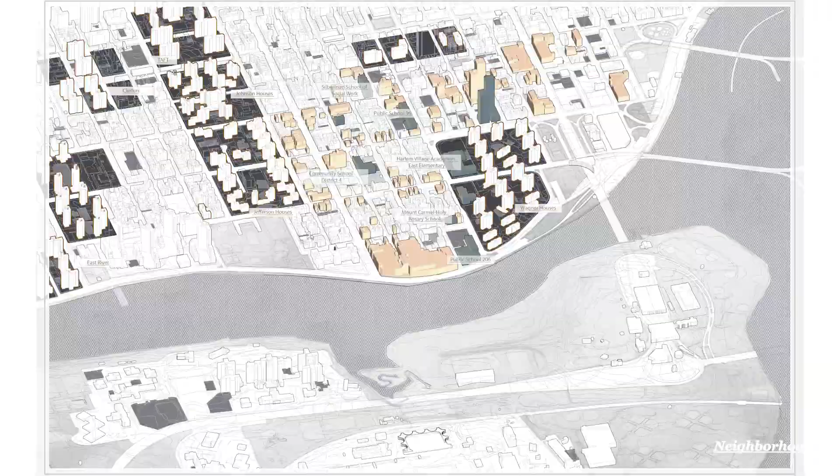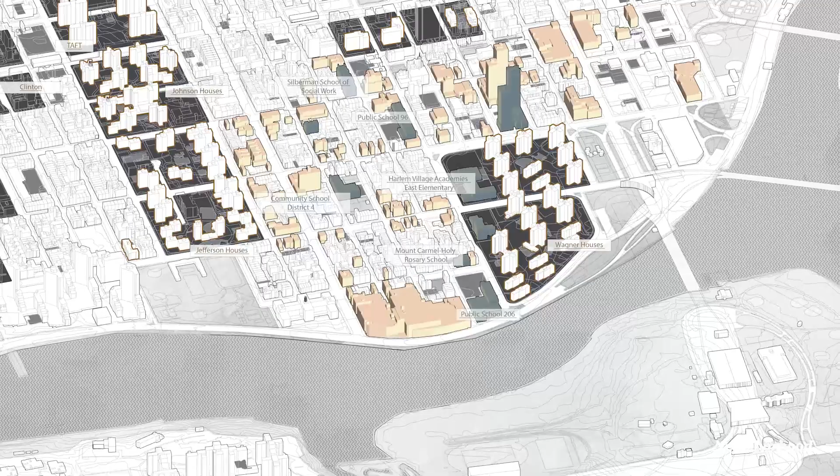Shop-lined streets support apartments above. In El Barrio, as locals call it, elderly men chat, groups of kids roam, couples push strollers. A great diversity of family types is evident. But the neighborhood lacks the programmatic diversity of Harlem's identity. Existing programs are isolated and scattered. A hybrid approach is needed to help El Barrio and other NYCHA houses regain its identity.

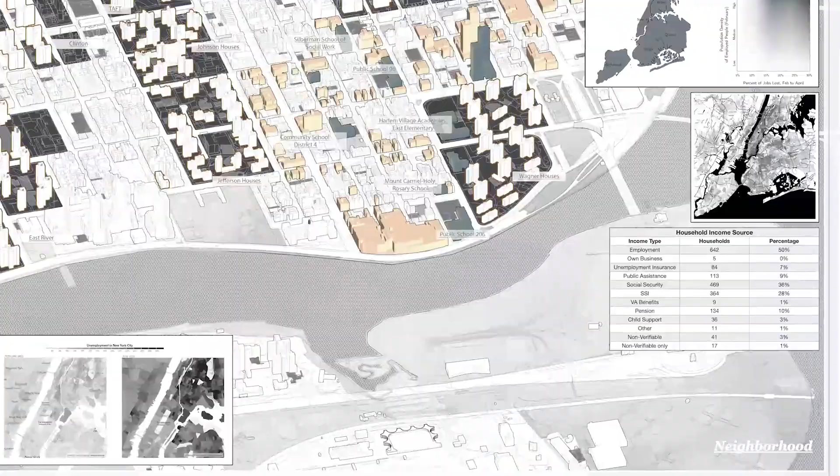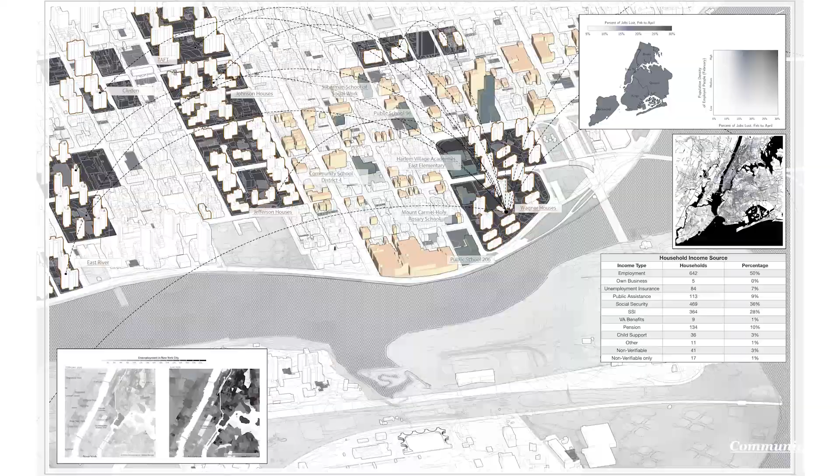On a broader scale, Harlem struggles with incomes and unemployment. 1 out of 10 adults are unemployed, and residents spend over a third of their income on rent. 2 out of 5 adults have college degrees, while 1 out of 5 lack a high school diploma. Young professionals have limited access to professional development beyond retail. Many of these locals live in NYCHA's subsidized housing. Our Wagner Houses site shows how disinvestment in public housing has led to crumbling infrastructure and unreliable service.

As we approached Wagner, we left the urban fabric. The dense frontage faded into an archipelago of isolated towers of infinite brick and small windows, indicative of a vertical slum. The existing layout prioritizes efficiency over humanity.

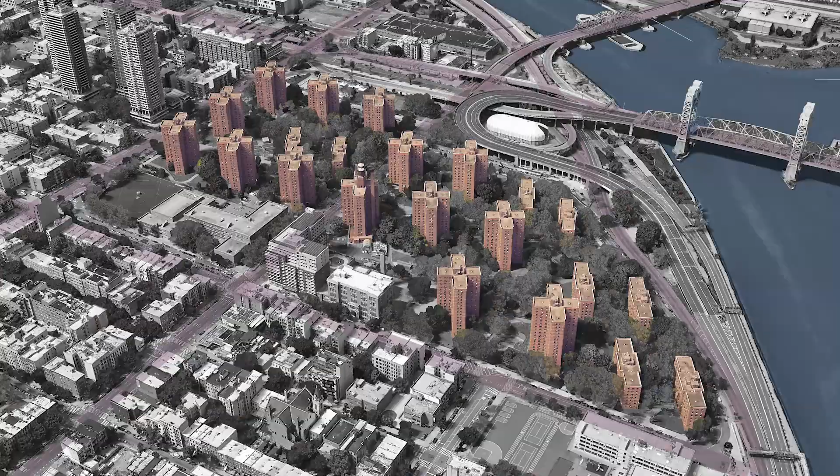Each apartment unit is too small for the often 3-generation families crammed in them. Their tiny bedrooms lack sunlight and balconies. Narrow corridors of yellow tile and trash evoke a prison institutionalization. In the darkness, we were cold, disconnected. These compounding problems create a cycle of dependency. The site hurts health, social life, mentalities, while limited job options stop people from building wealth to escape. They do not remove them. There's water leaks, there's floods, there's total disintegration of no light and gas, no lack of service.

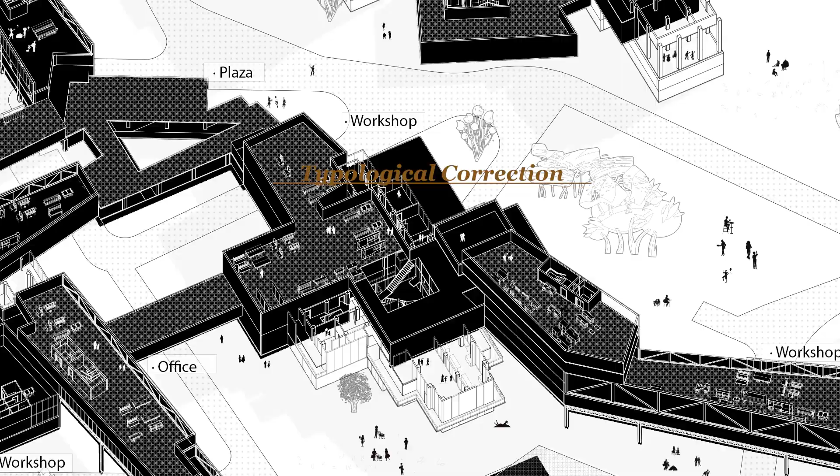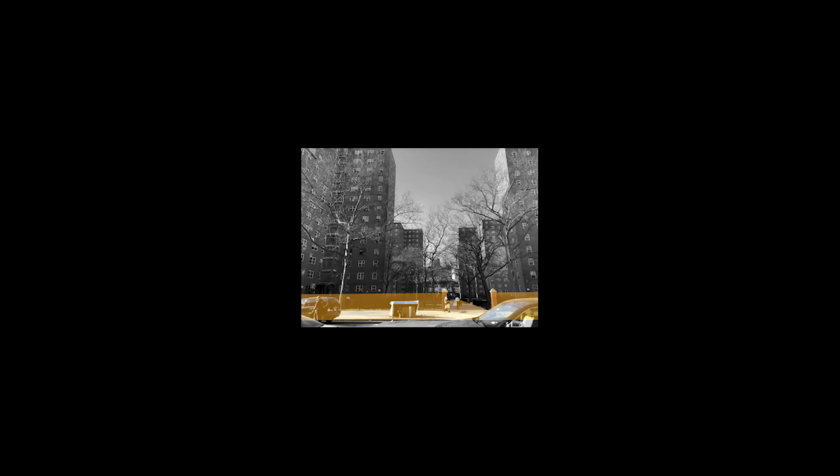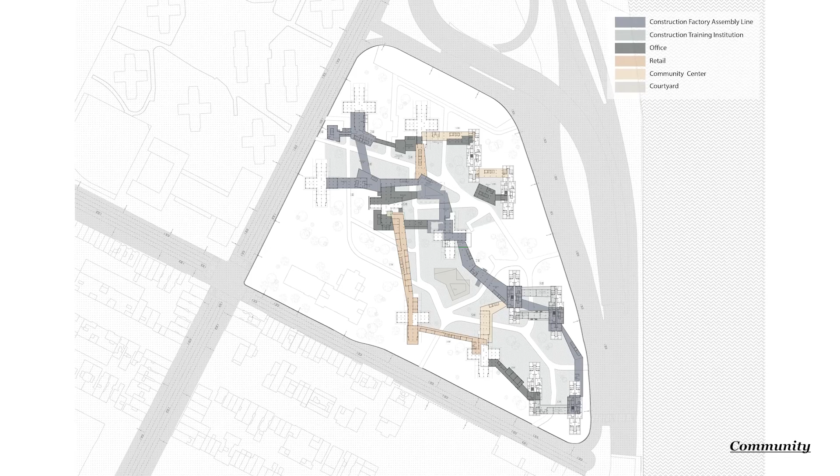Our change starts with engaging youth in civic action, while teaching job skills and collective power. The new Wagner houses establish a hybridity that raises awareness of these systemic challenges. The industrial and domestic realms integrate in experimental live-work-learn co-ops. This solves isolation, unemployment and unaffordable housing, while allowing residents to earn a wage by building their collective homes. Our analysis combined some Harlem functions like carpentry, art, textiles, and crafting, with its flair for music, fashion, and nightlife. Through these frameworks, we aim to end the isolation of the ground space through the residents of NYCHA and beyond.

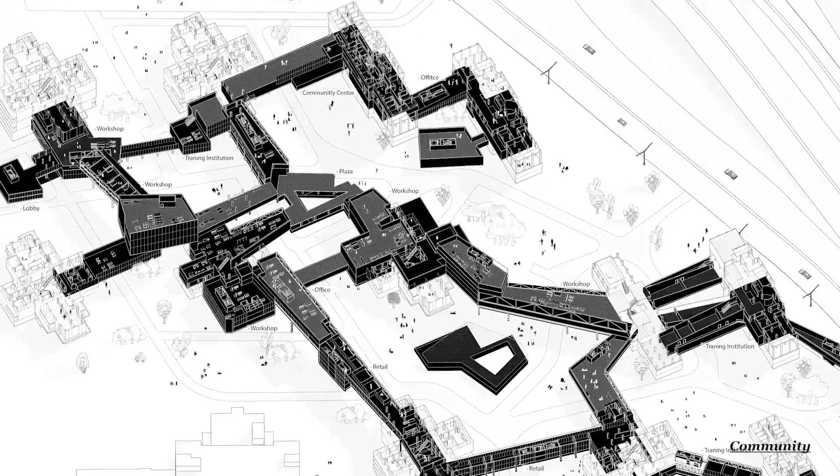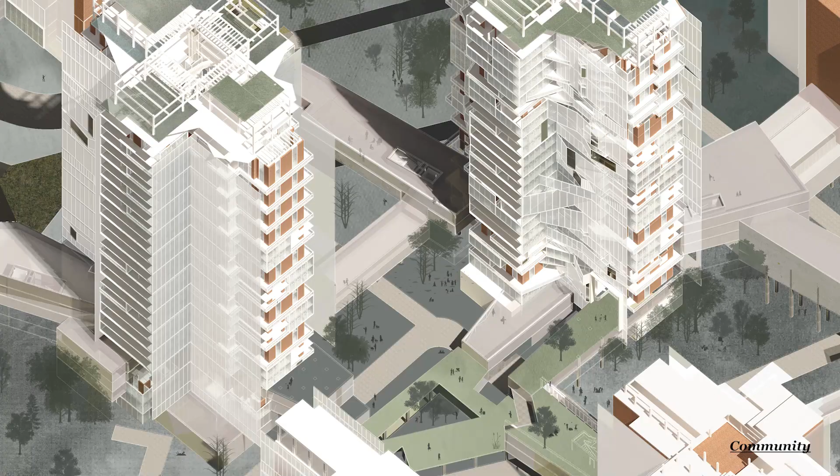First, a bridging system solves the tower's isolation and lack of services. Modernist orthogonality is broken by its angular form. Workspaces provide areas of production for residents. Adjacent institutions offer experimental training. Students become self-sustaining as they learn new construction methods and practice transforming in their apartments. Shops pull visitors through the new ecosystem of consumers, sellers, teachers and trainees to the world. Framed beneath the bridges, wild grass courtyards provide rest and play.

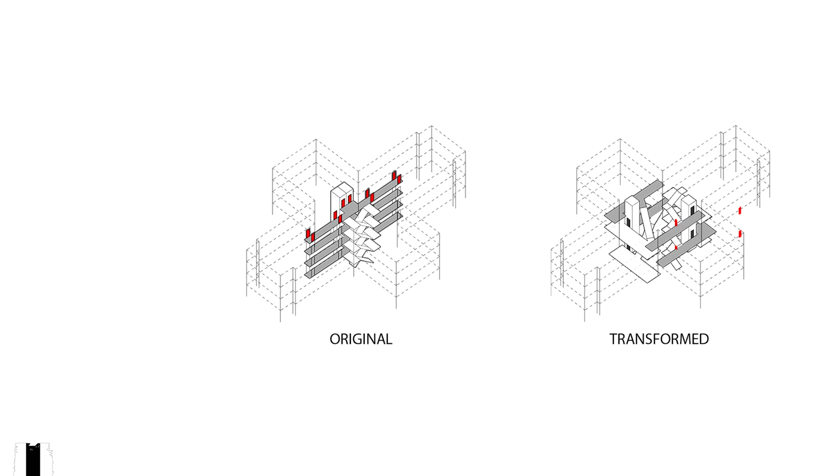Next, the towers extend vertically and horizontally to prevent displacement and add hybrid functions that alter floors. The old construction system and existing materiality are maintained, as sun-oriented patios expand the floors, adding light and views, and escape the dense column grid. Instead of small, dark corridors, the new open-air atrium carves out the stuffy core, passively vents, and creates a breezy, bright center. In lieu of the traditional circulation system, playful circulation increases accidental chats between new neighbors.

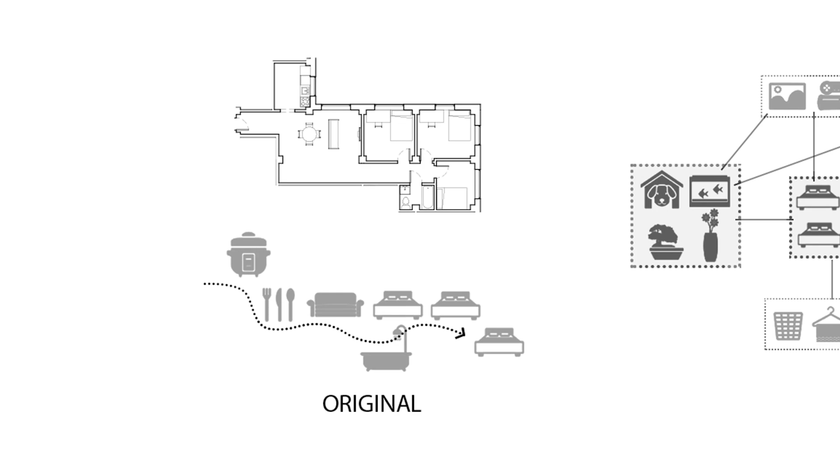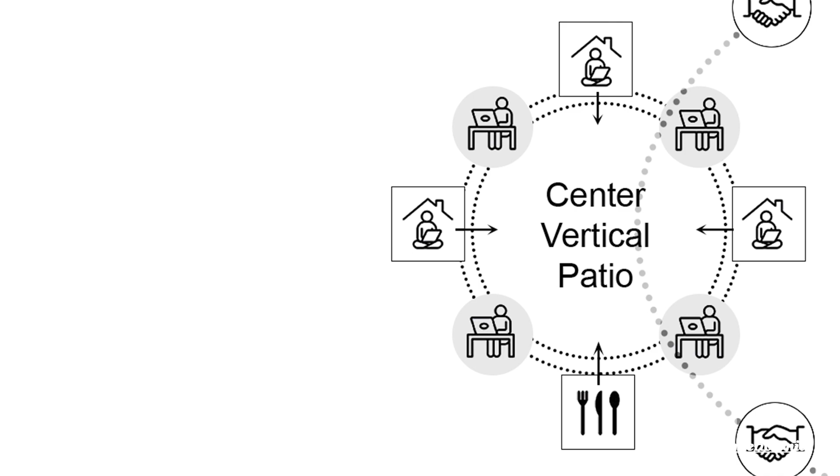Cascading voids interweave functions within one floor, while keeping the programs coherent. Singular units are transformed into collective shared living, becoming larger, more luxurious programs. Our 2 shared unit types are the 3-family and the dorms for 10 individuals. Integrated shared office types are split into the south, sun-facing kitchens, and the customizable workspace on the northeast and west faces. Meanwhile, lowest floors contain necessary functions like laundry and canteens. Bedrooms and living rooms face outside, and offices face inside, enhancing the collective and co-working atmosphere.

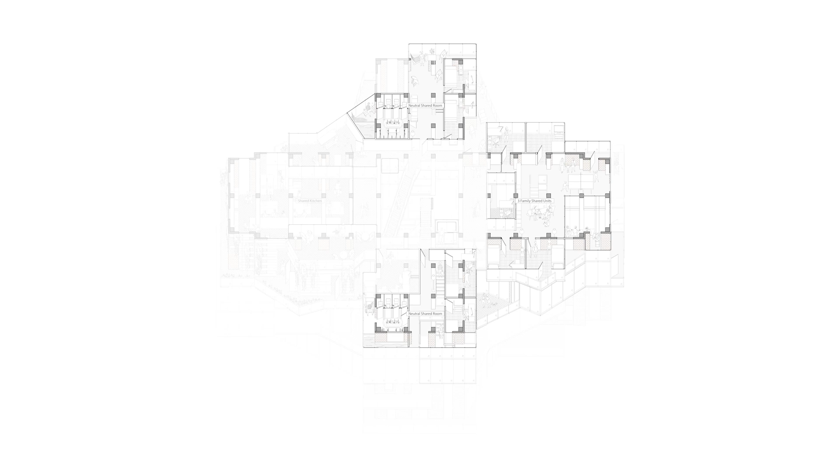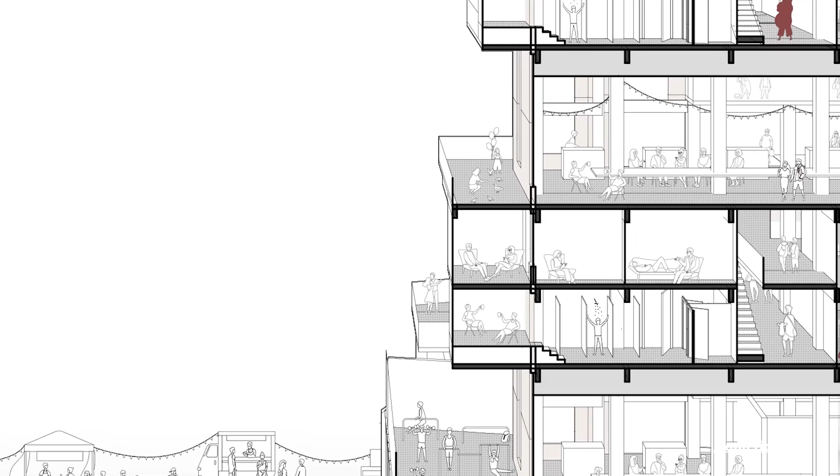Multiple stairs and elevators access alternating open mezzanines. As you leave your unit, you look into kitchens and in-home office rooms, and see others in the shops below. Our units feature individual, modest-sized bedrooms. The bedrooms are realigned and grouped, forming a collective welcoming suite. Double-height winter gardens tie two floor programs together. This channels light into the apartments and provides another layer linking outdoor and indoor space.

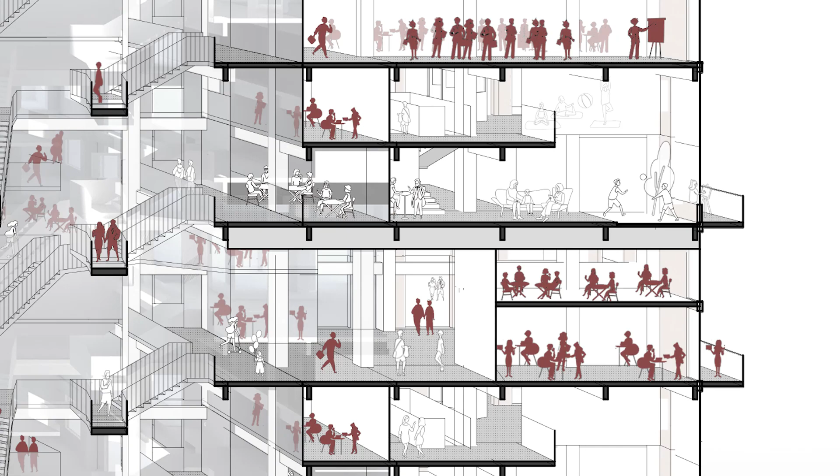Life's daily dance is reoriented, causing sporadic intersections of people throughout their homes. For example, meeting another resident at the shared clothes closet, or by the sink and pool baths, or walking out of your unit through shared offices. These hybrid co-work spaces in the units are large enough for residents of different professions to share.

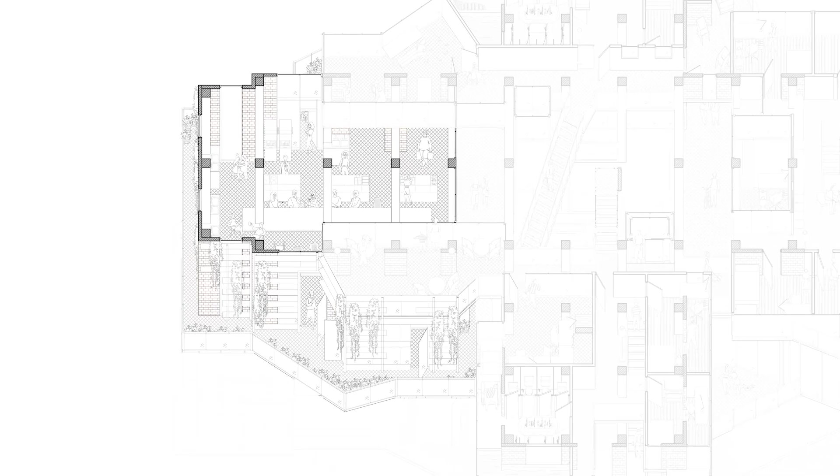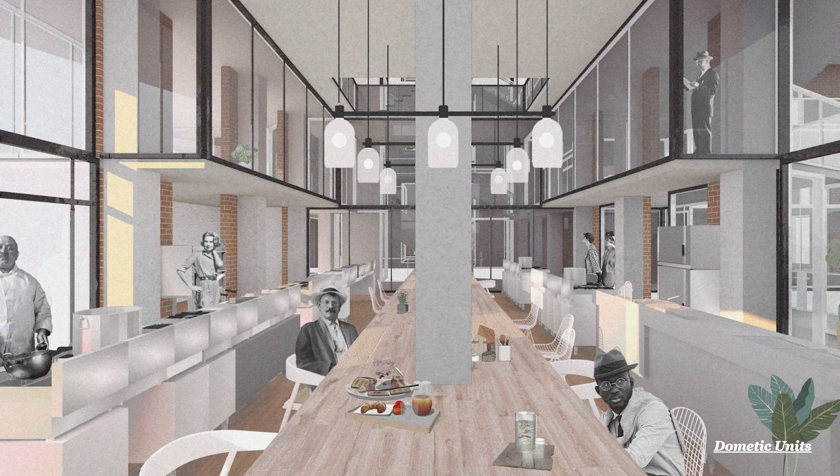The kitchen has become increasingly important in recent decades. It always has a role as a place of gathering or sharing with others. Our kitchens are reorganized into the ultimate event and sharing-oriented space. It centers on a massive dining table. Cooking stations, storage, and vegetable walls wrap the grand table layer by layer. Whether cooking for one or baking for many, experts and amateurs cross paths. Here you party, here you cook across from others, here you exchange cultural recipes, talk in the gardens, and enjoy feasts and new connections. Office space cascading with living units provides work opportunities and a professional atmosphere.

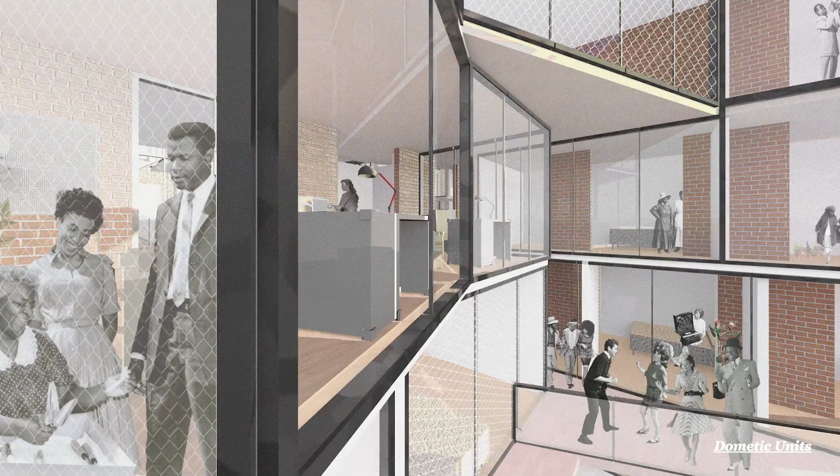It creates affordable space for handicrafts. Here, residents can start their business and express their full creativity. Additionally, the open atrium allows for passive ventilation, while enclosed spaces are easier to cool. Angled glass facades juxtaposed by reused bricks further create an ethereal materiality.

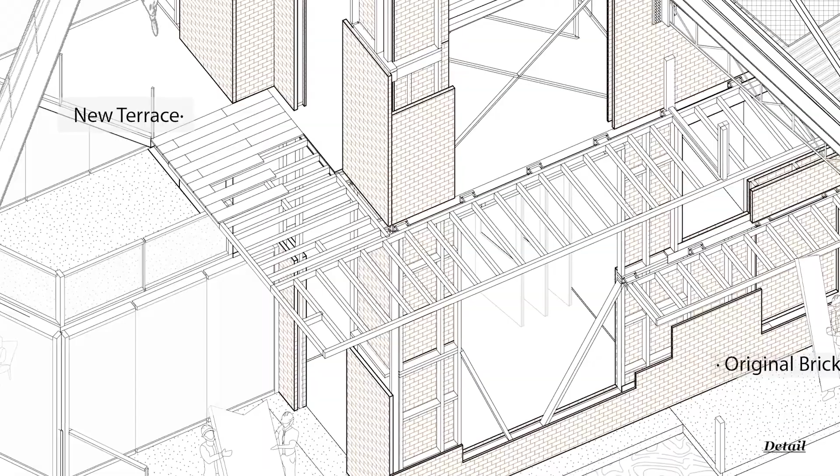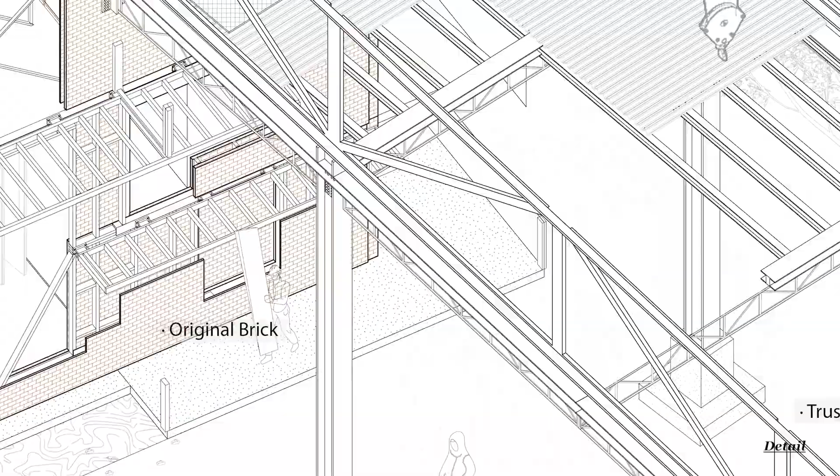The project phases begin with the construction of the bridging. Its didactic, lightweight dual truss system is supported by exposed I-beams and anchors into the tower's rigid concrete structure. Metal decking provides sturdy floors for program and stormwater green roofs. New walls and balconies use steel frames with finishes, and are bolted into the existing slabs. This also eliminates the former rotten wooden frames. Existing brick is reused where the existing walls remain, a solemn memory of the old Wagner. Throughout construction, residents will be employed, providing wages, training, and character to the site.

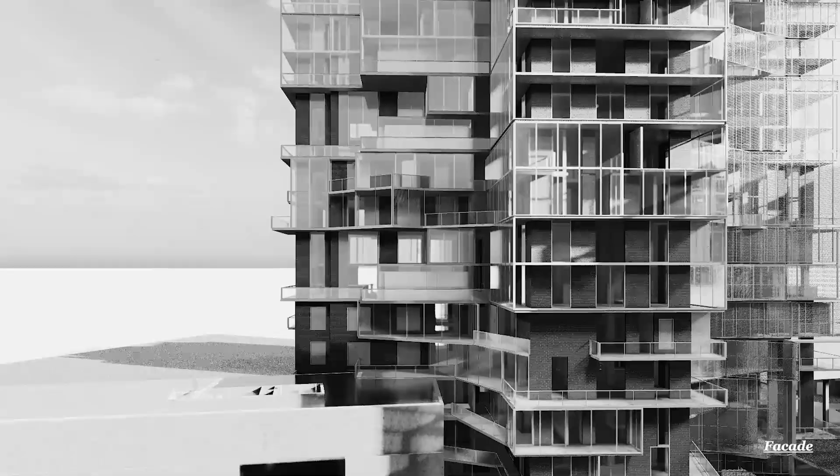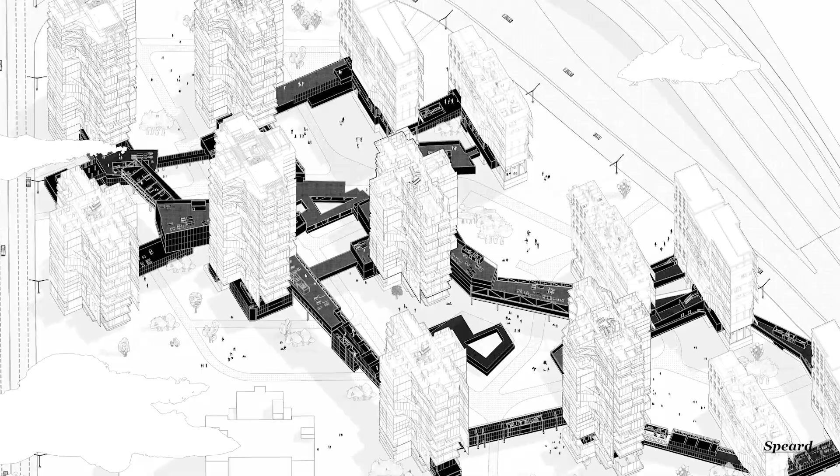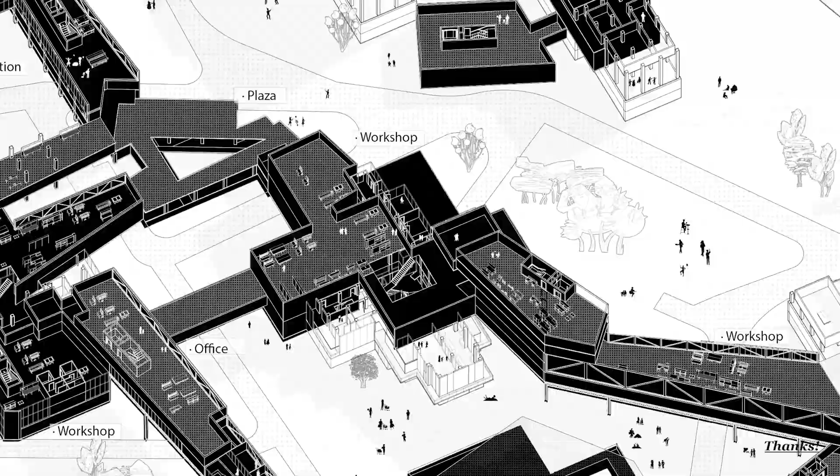Children play, lectures ensue, adults relax on lunch breaks after working and learning. Shoppers near and far buy local in the breeze. Bridging towers, bridging Harlem.